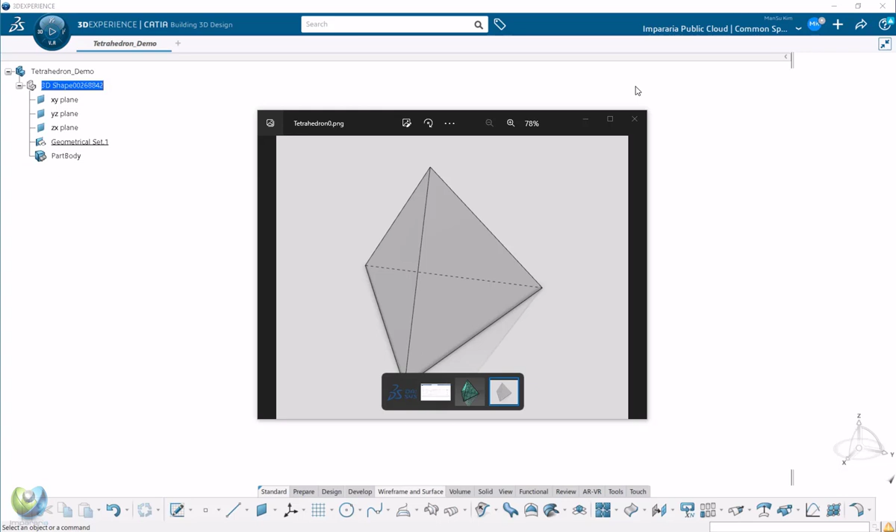So first method - before we start, usually since we want to build a parametric model, we always want to change the location and position. The standard locations, we usually don't use these since they're preset. We want to build our own way, always, so we can change the location anytime.

So just for example, there's some point somewhere - this is the point, center point. Then maybe we want to build the directions, z direction, something around like this. Then maybe also we build the plane.

And we're going to create the sketch, and the sketch you should set this projection point. So this point will always follow the sketch as a sketch origin.

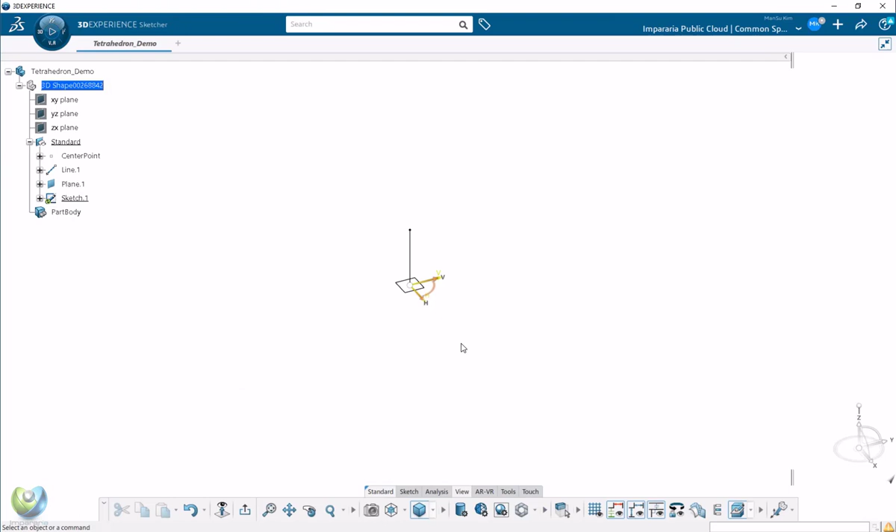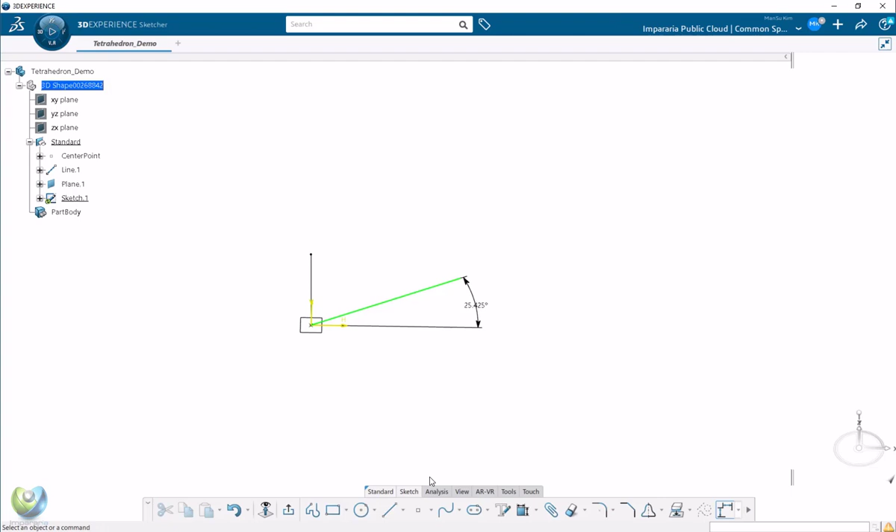Then we create - let's say we're gonna create some rotations from the horizontal line. These rotations I want to use as origin of the x-axis, 100.

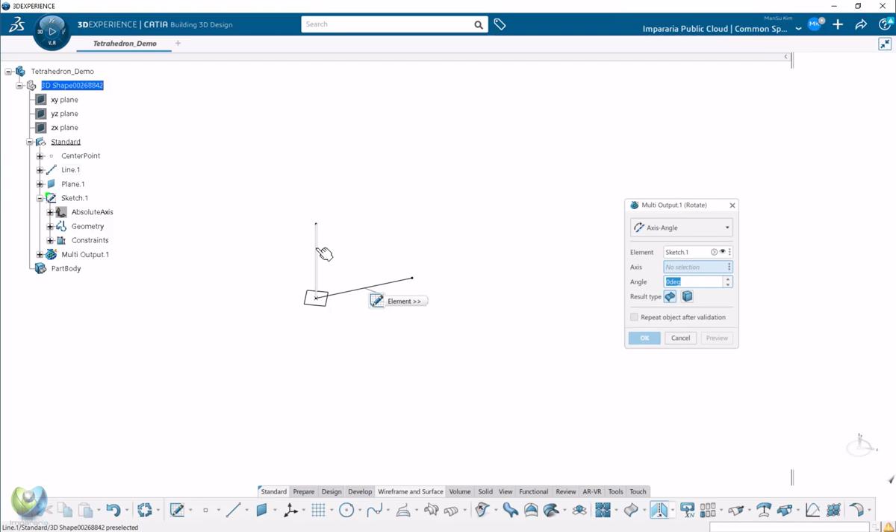So now we have x-axis and the z-axis. We want to rotate the axis with the z-axis 90 degrees. In this way, you can define your own axis system and the locations. So this is y direction and this is the x direction. Just always make it once like this.

You can create it as a power copy, so you can use it anytime, anywhere. Once you define it, you can change the location, and all your model will follow your axis system. This will avoid errors when you're using those and want to move something - sometimes you will encounter errors.

Okay, let's get started then with the first method. It might be one of the easiest ways. So let's create the cube - we will extract from the cube, creating the tetrahedron. So we're going to sketch here, and the projection point should be here.

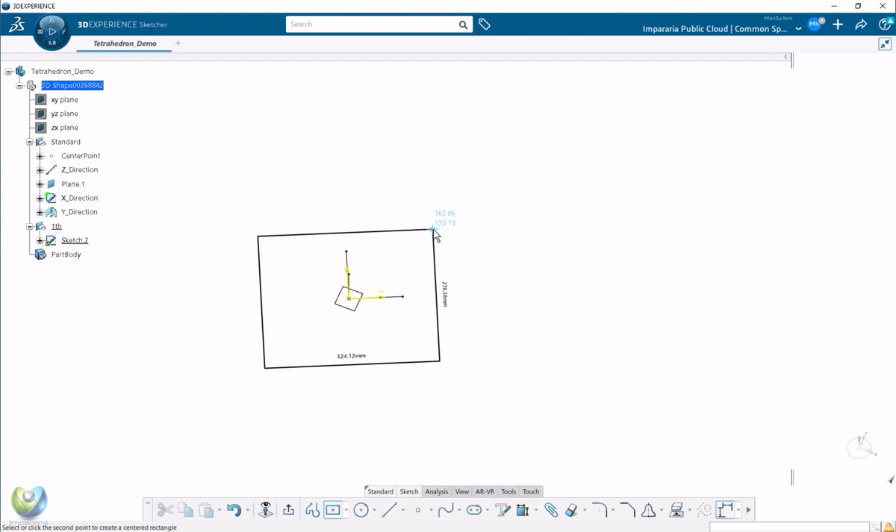Now orientation is parallel to the line, the x-axis. So here we're going to create it in the center, and this length, let's say 500, and this length also 500. We want to control this size, so we're going to create the parameter later.

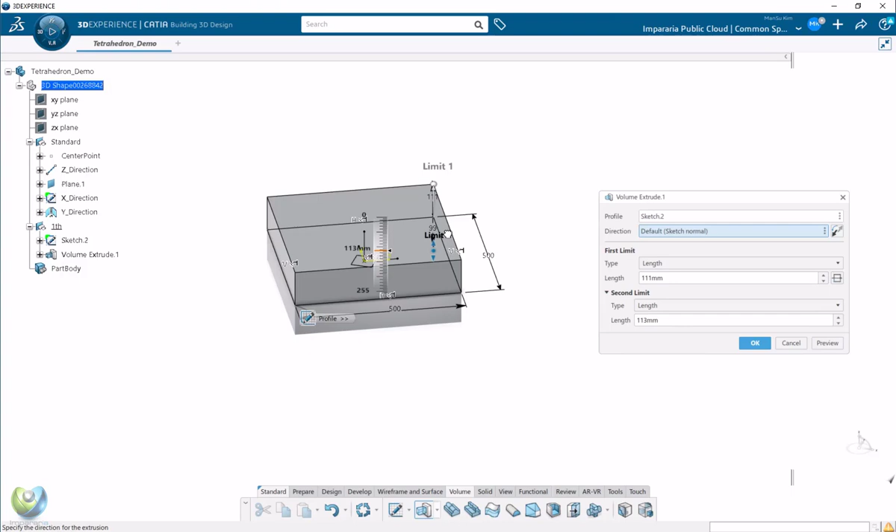Then, well, let's just create the volume for now. We're going to use the sub element, so this should be 125, 250, something like that. Or you can also use this since it's symmetric.

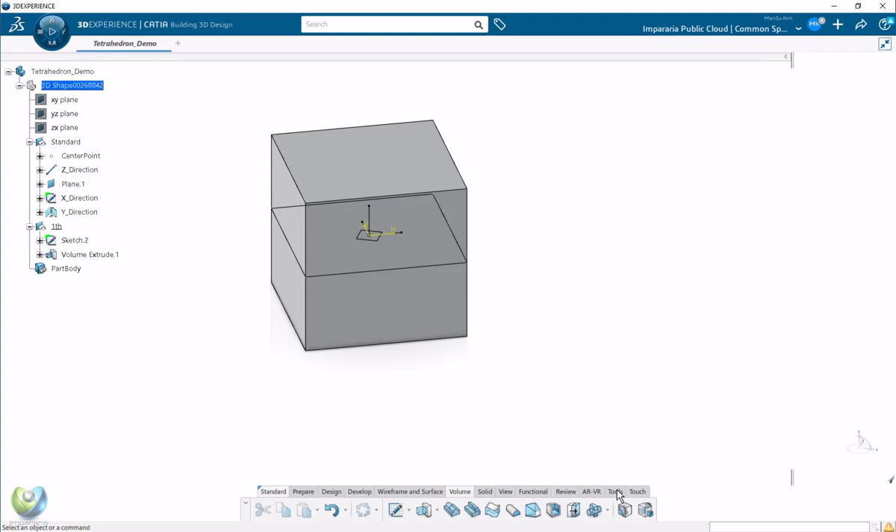Now this volume we're using as a reference, so this will always be there, since we're going to use the sub element - we don't want to delete it anyway. So that 500 we want to fix, so you can create the parameters length here.

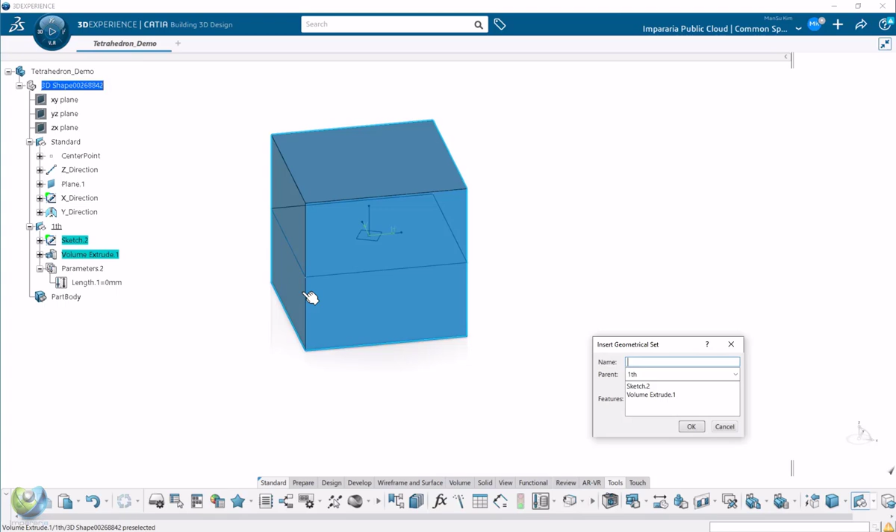So there's some different ways, we're going to create it under here. I'm just copying it, and you can create another geometrical set - I will change the order. Then this one we call size, okay, 500.

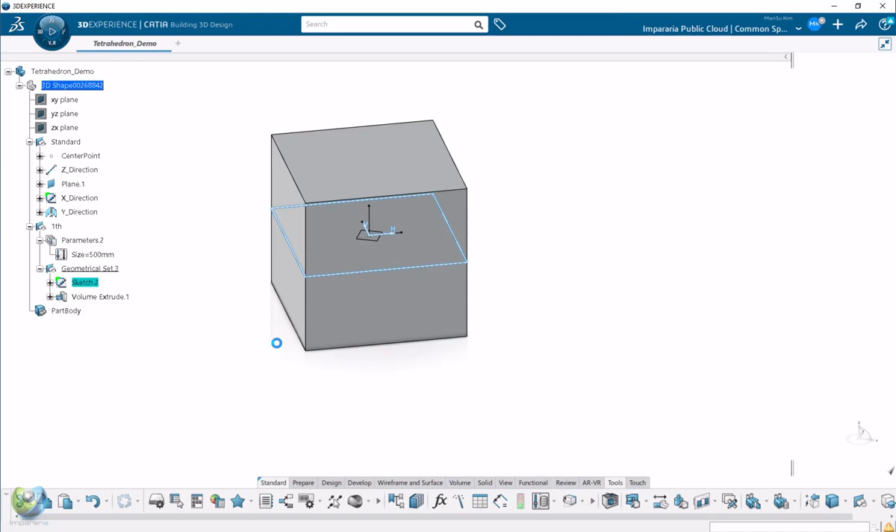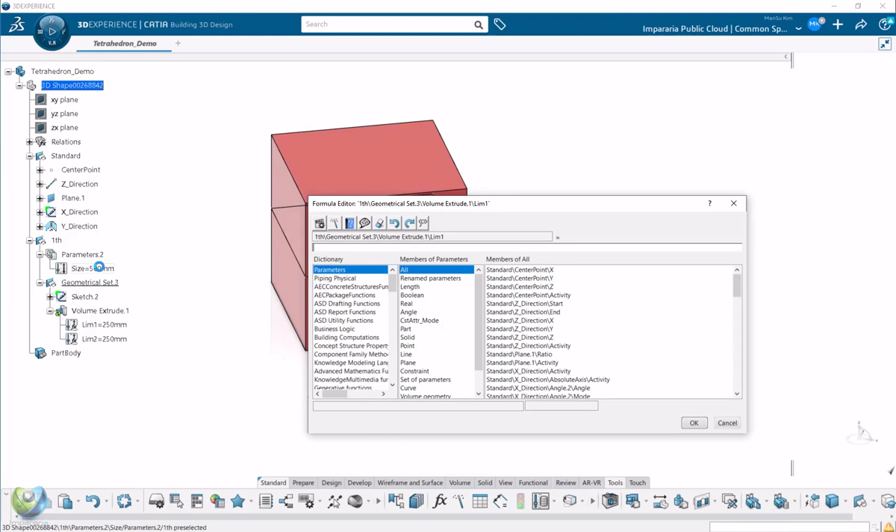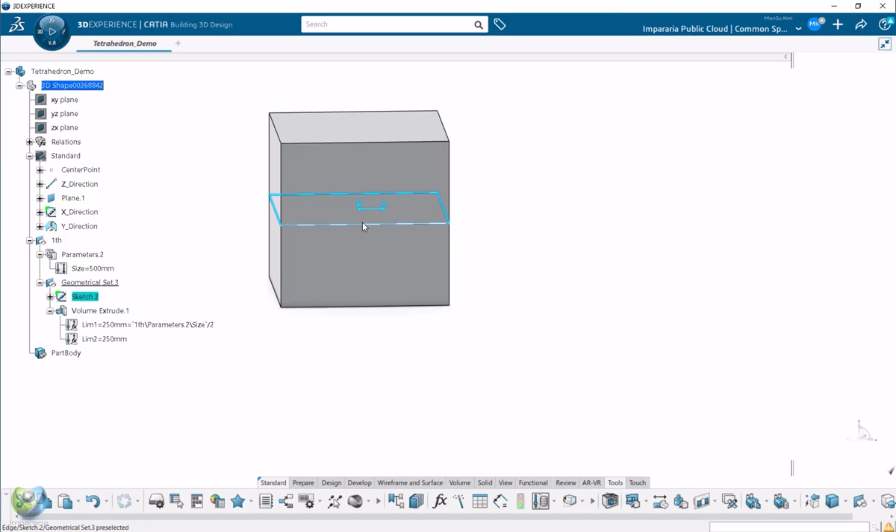So we're going to link this one with a formula - double click, same as this length, double click and click the parameter that you want to link. And now this one also, go here and right click, edit the formula and double click. Should be divide by 2 here. Okay, here we are. So now I just hide this, and this - oops, this will hide the 2, and here.

Then for understanding better, I will create it with a little transparency. Okay, then now let's create the tetrahedron.

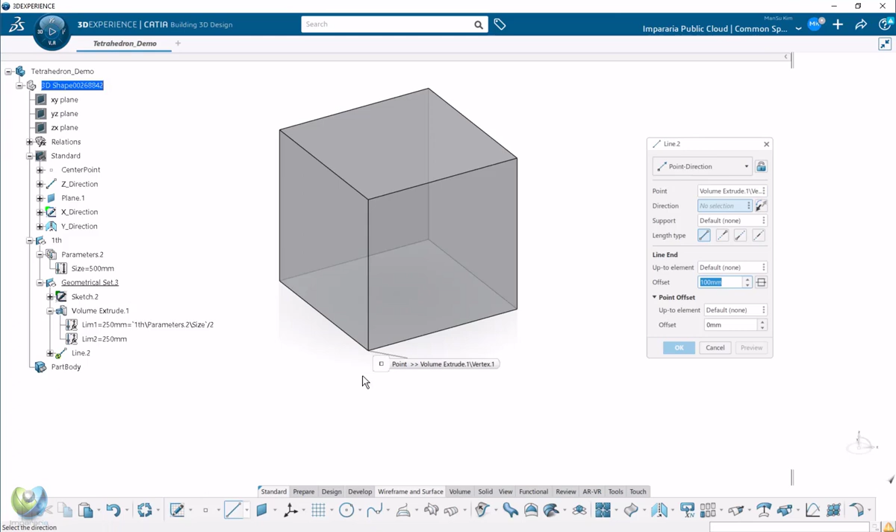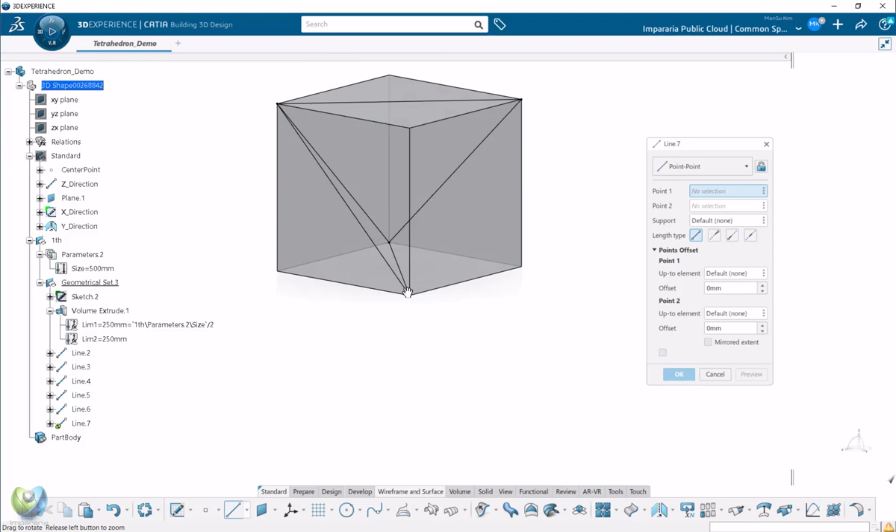Once you click the corner and this corner, okay, then OK, and also click this corner and this corner, click OK, and this corner to this corner. Okay, now another place, creating here to here. Then you can see the triangle, so here to here. In this way you see the size of this line will be the same, since we're going to use the cube. So the last one will be here.

Okay, so now I'm going to hide the cube. Here we have - so this is the first way. Let's just finish.

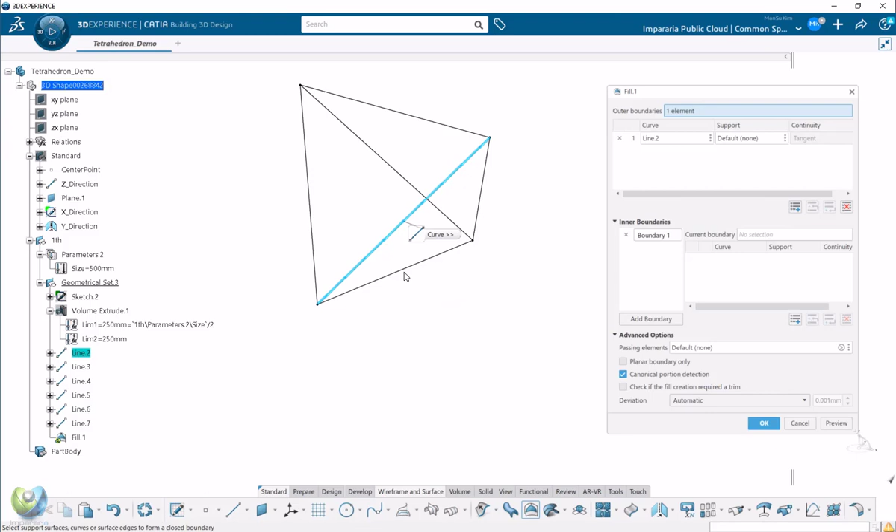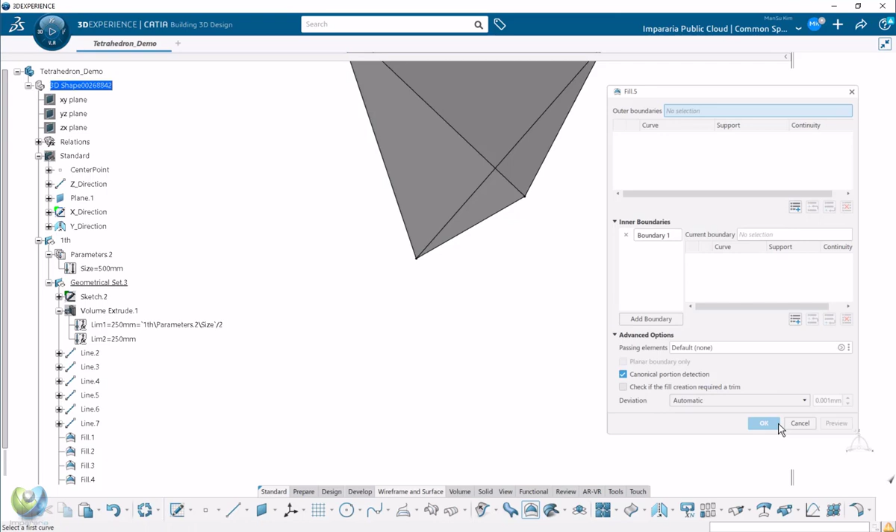Maybe we can make a fill. Okay, here you are, so we'll have the shape now. Then just finalize, create, join everyone together and here. Okay, so this is the shape.

When we want to change the size, always check that while modeling if it still works or not. Now when you have the relations here, we want to put it inside of this geometrical set - I Ctrl C and Ctrl V, okay, and I'm gonna delete them. The formulas you can activate here, so this will still relink them. So let's say for 300 - it works well, so for check, measure item.

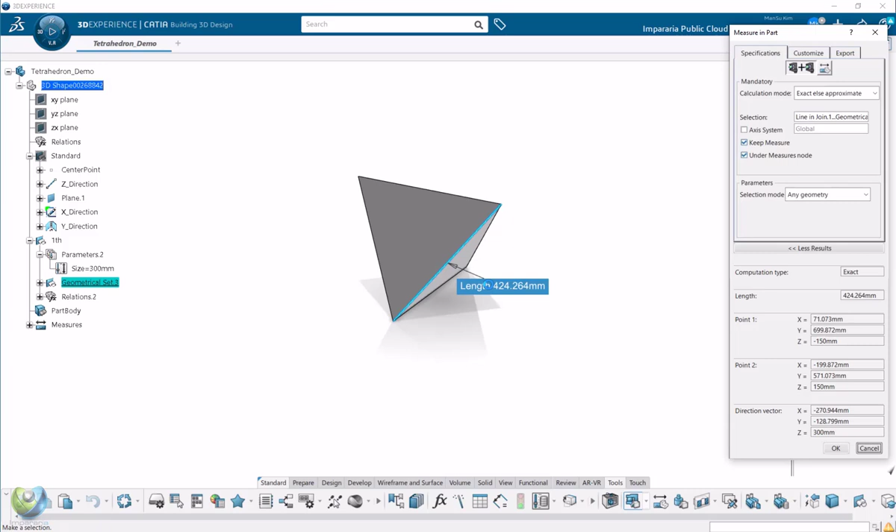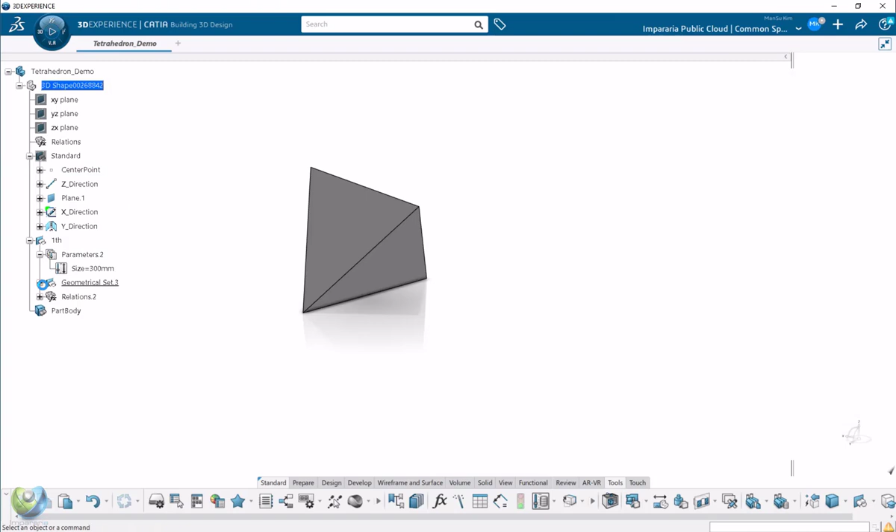So this length is all the same. Okay, let's move on to the next method. Since you know the length, for example, we want to control the length, not by the shape of the cube, right? Because this is the middle line. So let's move on to the next method.

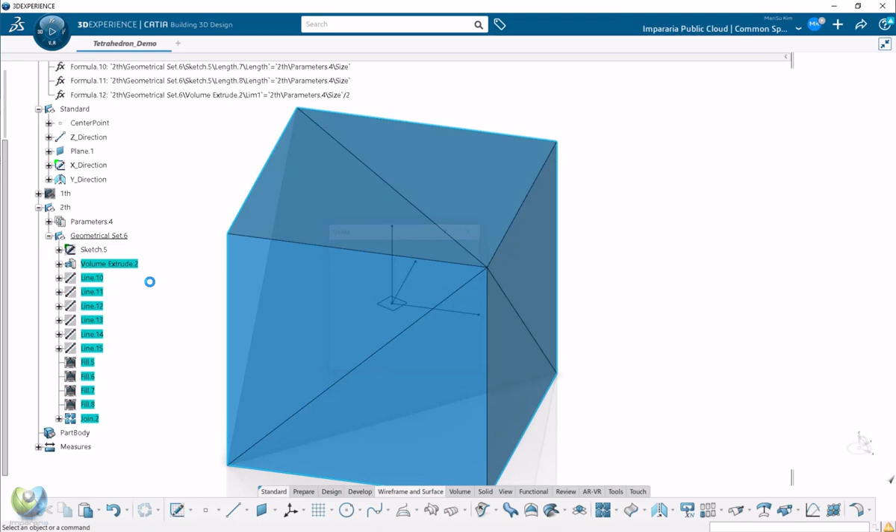Okay, let's look at the second method. We want to control the edge length, so we will create them from the bottom triangle. I will just copy this and delete all of them, just to keep the parameter and the sketch. And in this sketch, we no longer use this rectangle either.

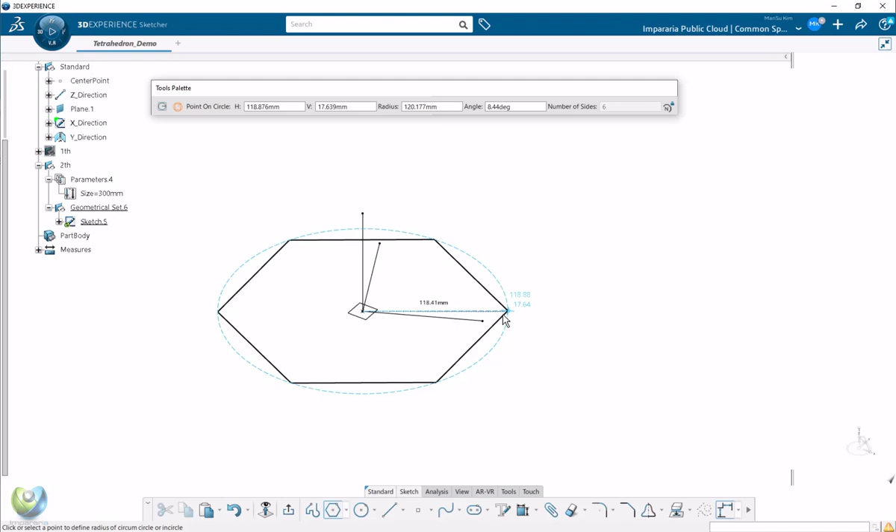So what we need is creating the polygon here, and we need to have a triangle shape here like this. Then we define it by the length, like this should be this parameter. Good, then now okay, that's finished.

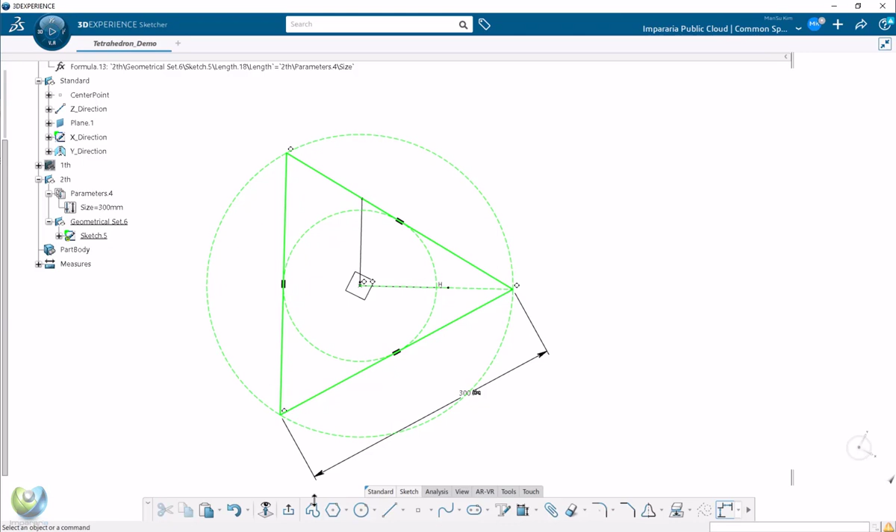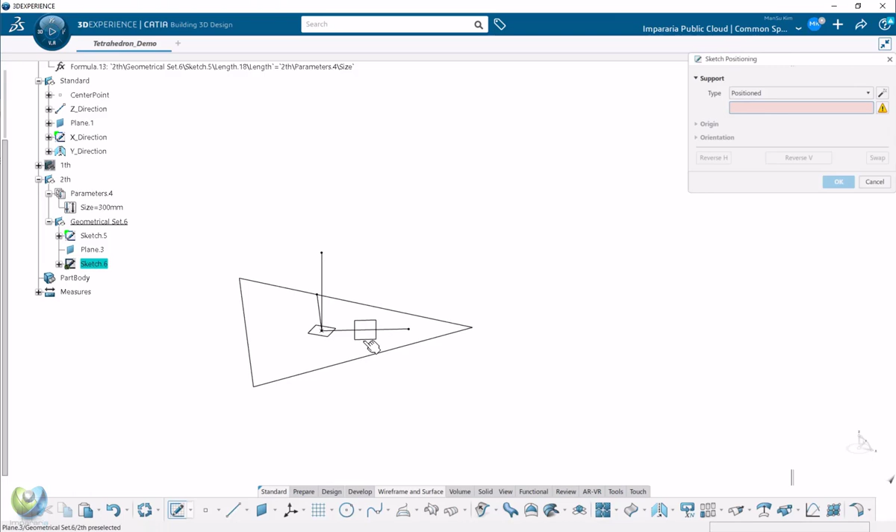Then now we want to create the line here, so we want to create the plane because we want to sketch here. Then we sketch here in the plane. Origin should be here. Orientation parallel to this line. So here we have it, then now we're going to create this line.

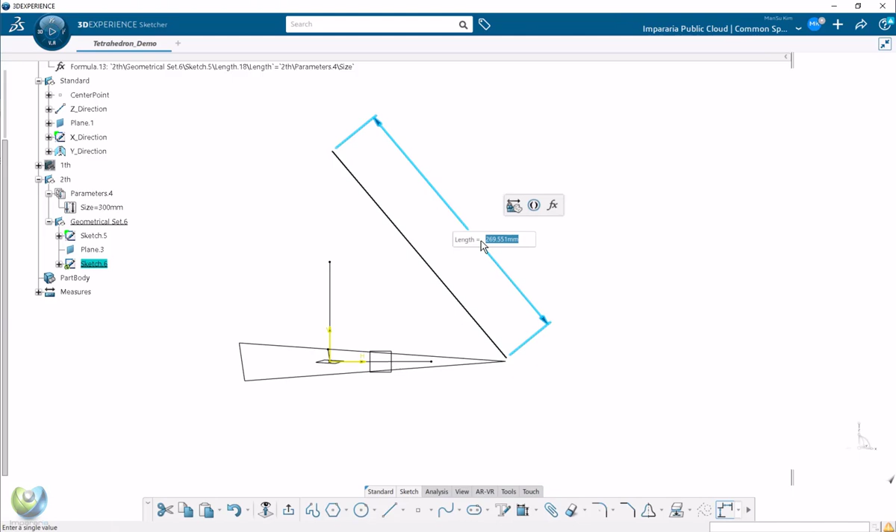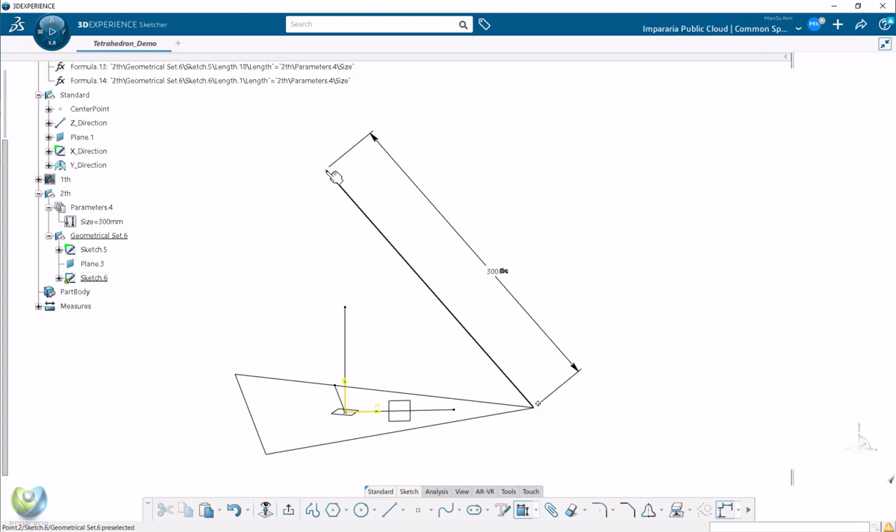Remember that all edges should be the same length, so we're going to create this length parameter with this size. Okay, then we need to coincide with this edge, and it should be this V direction matching here. So this point and this V direction should be a coincidence.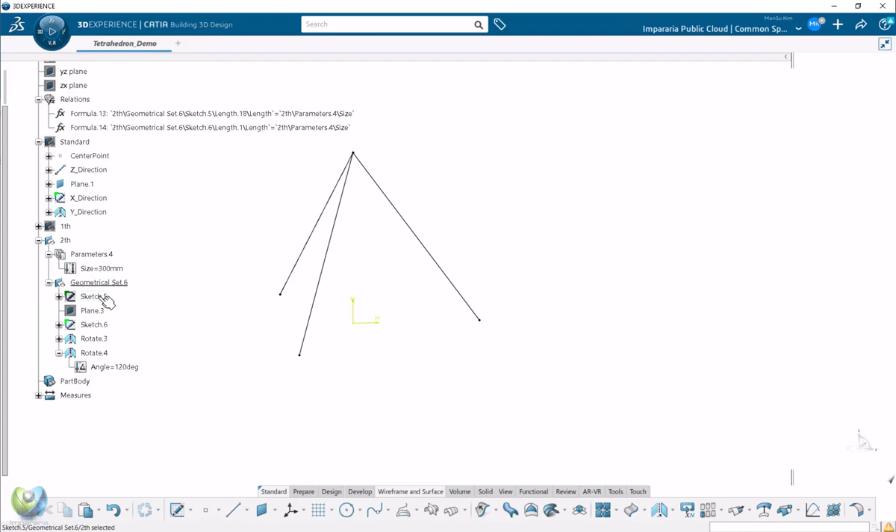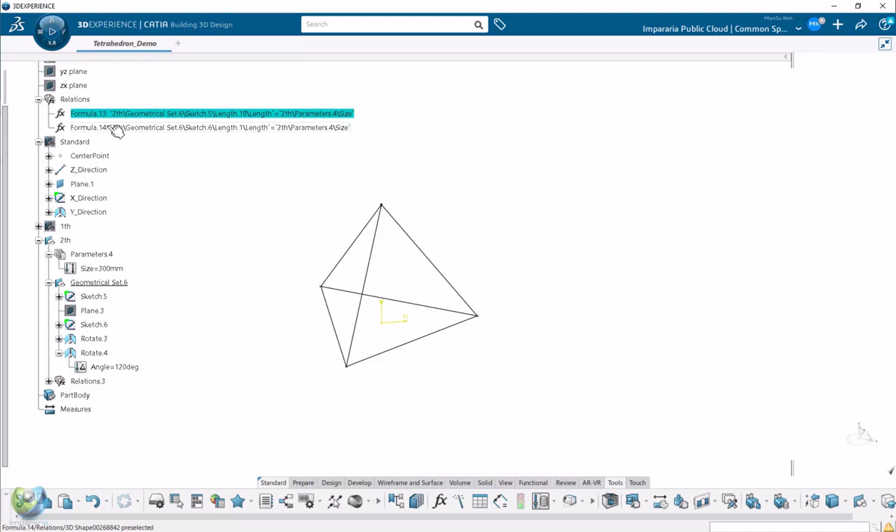So let's just check the size. This size must all be the same. Okay, so this is the second method I can introduce. I also move this one, delete it, and deactivate again. So second method, hide here.

Then lastly, I will create another method. We're going to use some kind of geometric and mathematical approach using the characteristic of this tetrahedron. So defining, if you remember this line, actually if we can create from the start this line instead of creating this bottom triangle, it would be faster and it would be a good logic as well. So let's do that.

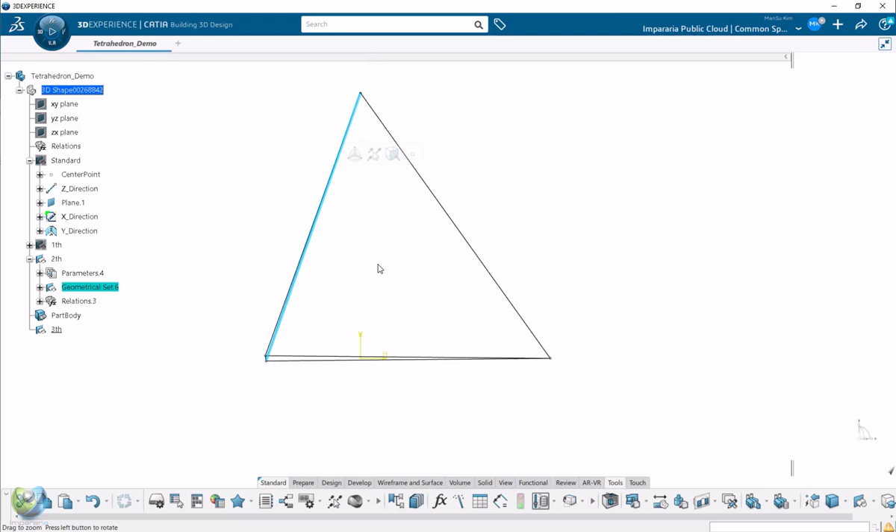Third, imagine that we are going to create this line from the center point. Okay, so we need to imagine this profile. This profile, this is the length, and this is not the same length in the projection view, right? This and this are not the same, but this is the same.

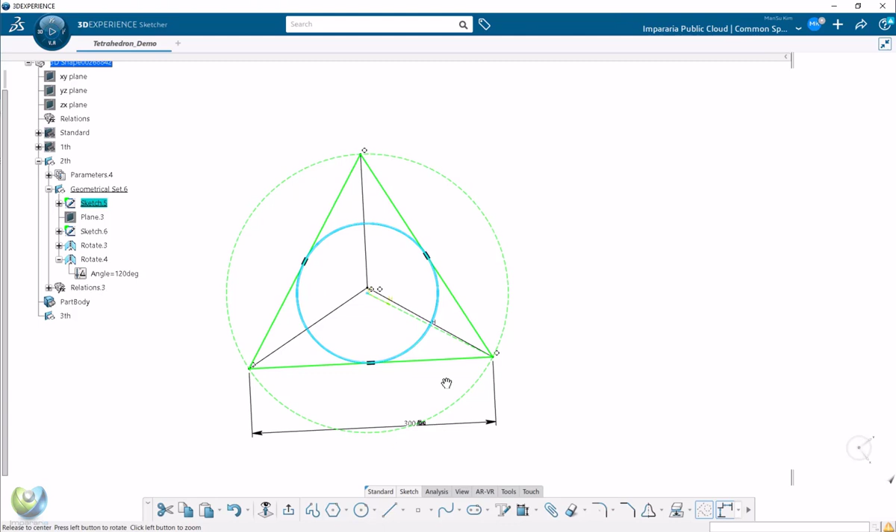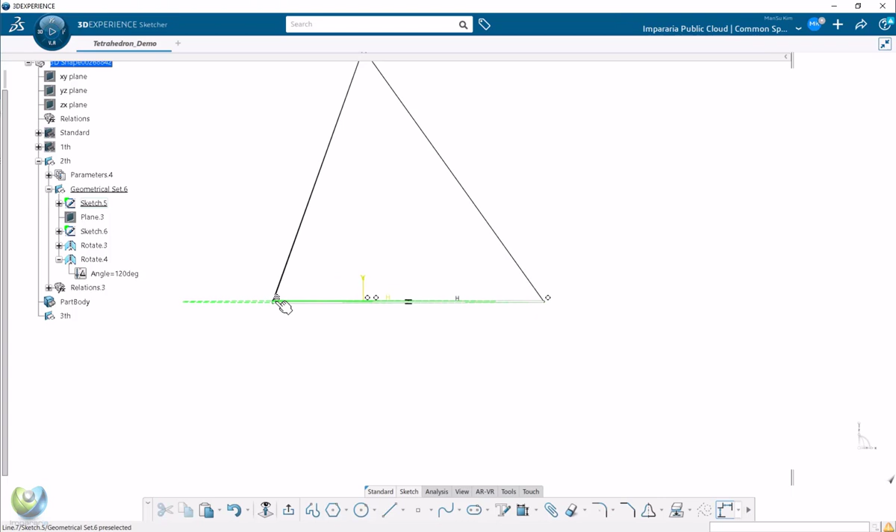But when you're creating, remember when you're creating the triangle, we use this method - there's an outside arc and inside arc, right? So if you think of this in 3D, it should be the sphere, outside of the sphere and inside of the sphere, right? So we use this methodology in the vertical direction. This point will be inside the circle, and this point will be outside the circle, right?

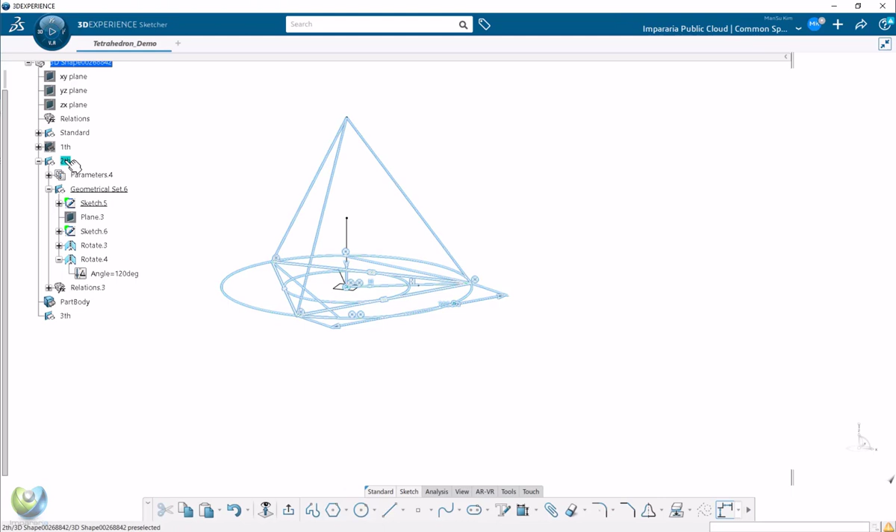So we're going to create them from here, right? So I will hide this. Seems we should better have more planes here instead of using only the XY plane. So here we create more standard planes. Okay, so let's use this one.

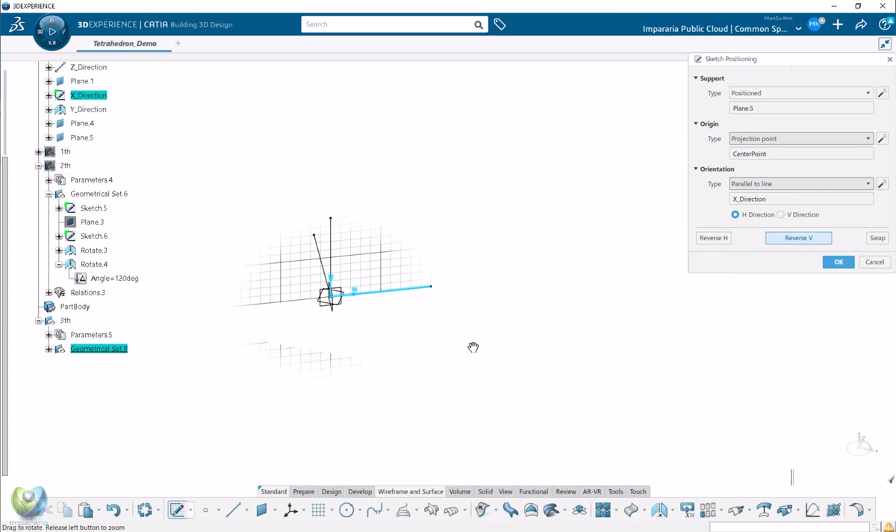So here going to copy only the parameter and the geometrical set. Sketch in this plane and projection point, and parallel to line. Okay, and I want to change the direction. Okay, good.

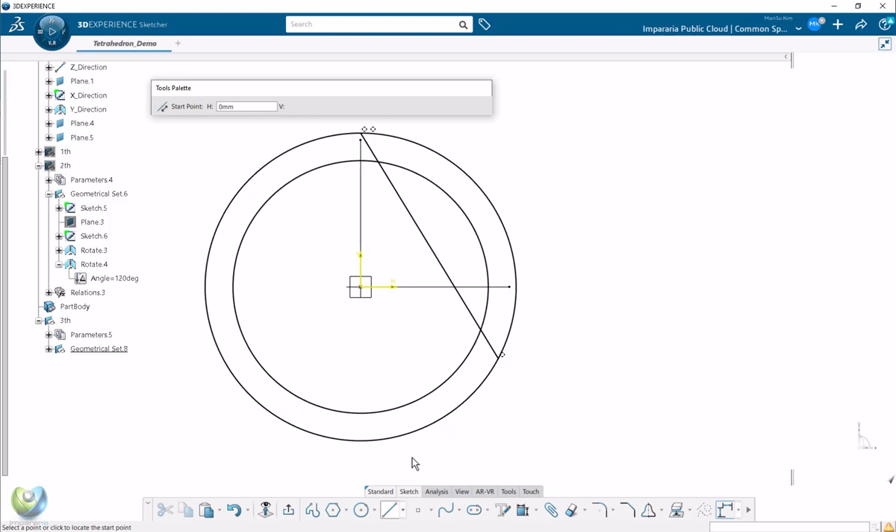Now what we do is create two circles, 1 and 2. Okay, then first line around from the top to bottom around here. Okay, then this will be a little bit smaller around here.

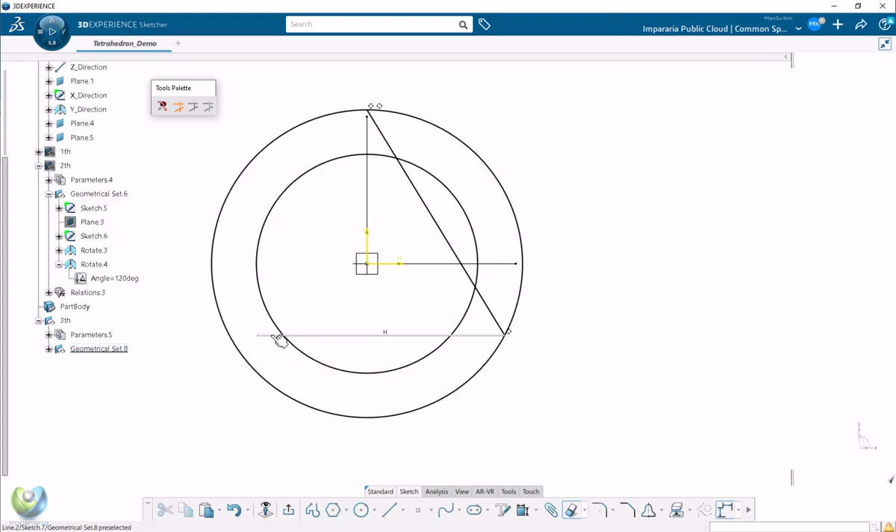Then here you create the parallel line like this. Okay, then we're going to delete this one, and this one should draw the center point, and this line we're going to match in the middle. Okay, so we're going to create this, and this should be perpendicular.

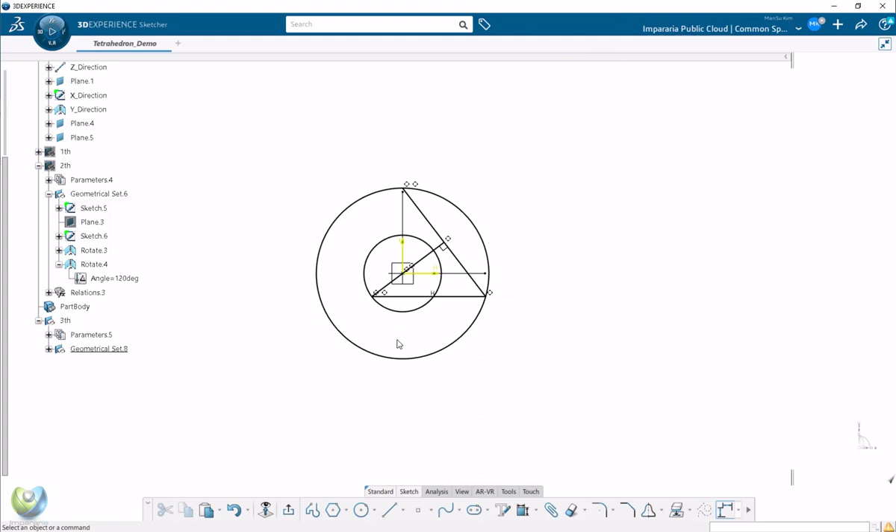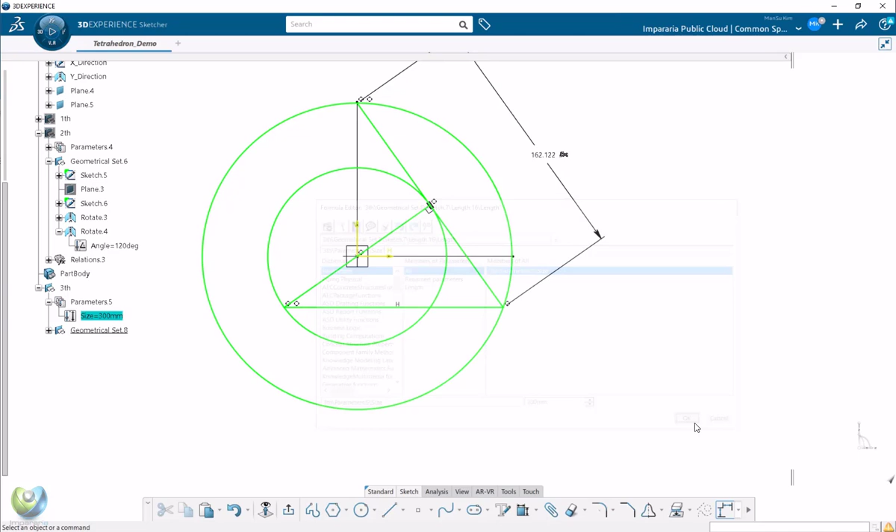But then also this should be tangent here. Okay, then now the size is fixed, only you can move only one. So we define this line with this parameter. So most of our changes are to the constraint elements.

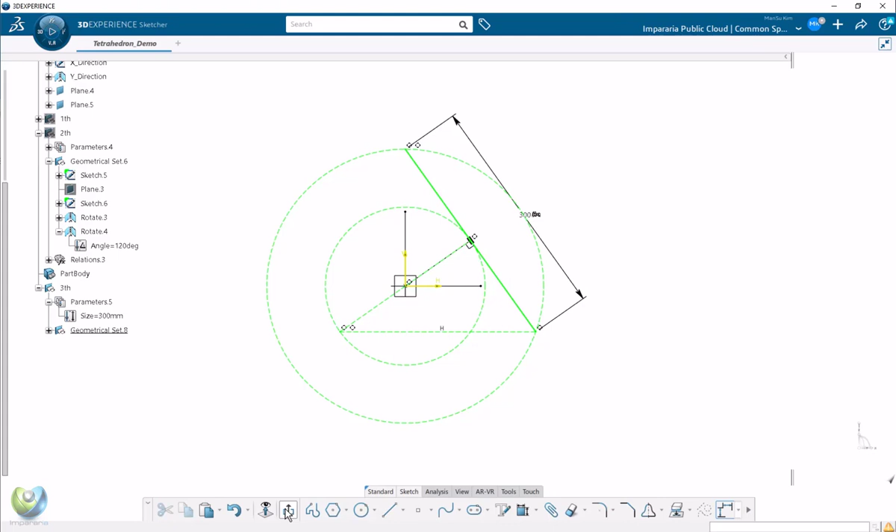So for creating this line, you can use geometry and calculate the mathematics, the angle of this line. Okay, then now we only have one, then rotate. So 120, and rotate again in the minus direction.

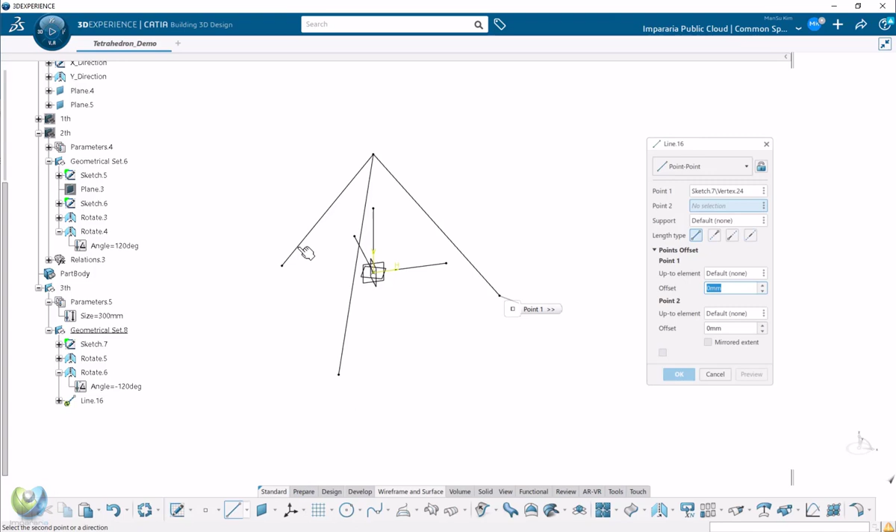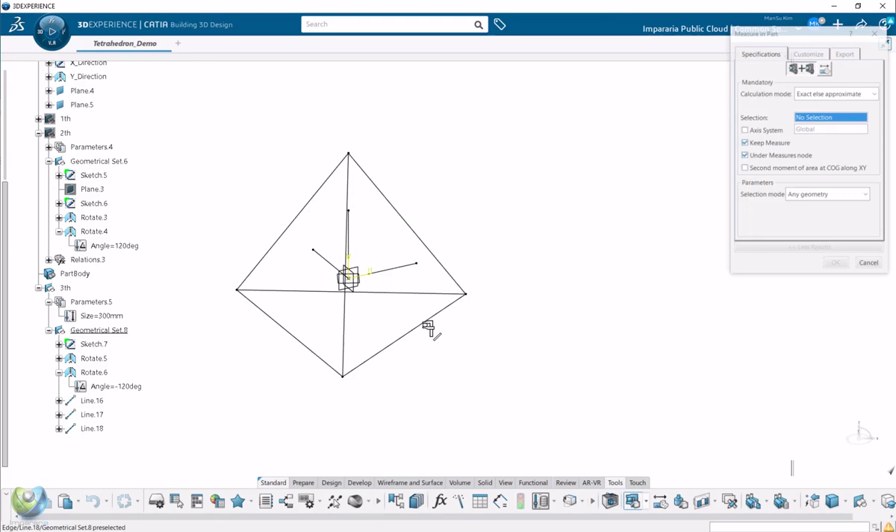And now you can connect them between the line to line. Okay, then just to check, let's try to measure again. So this length, they are all the same.

Yeah, so this is the third method. There are many different ways. I wonder how you defined this shape. So it will be good practice.